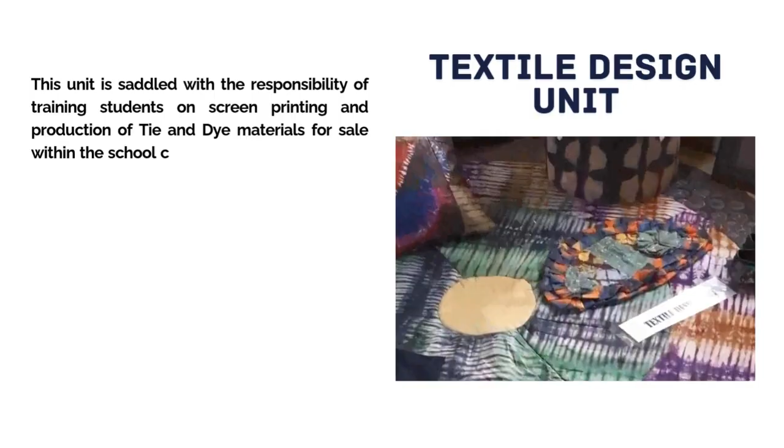Textile Design Unit. This unit is saddled with the responsibility of training students on screen printing and production of tie and dye materials for sale within the school community. Textile design is diverse and has many branches, such as resist pattern cloth, tie and dye, batik and adire, screen printing, reverse applique, quilt making, patchwork, garment making, tailoring and spinning, knitting and woven fabrics. This unit also produced kampala for staff, batik for Wapoga Games, souvenirs for Texas Tech USA Tour, USAID/Winrock programs, printing on departmental lab coats, and other screen printing contracts.

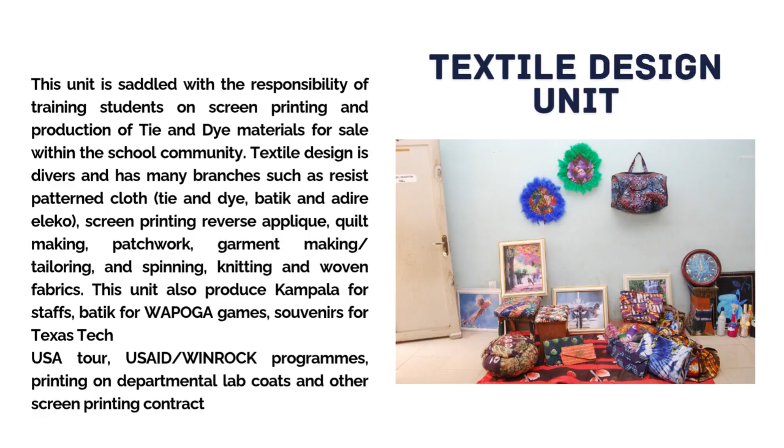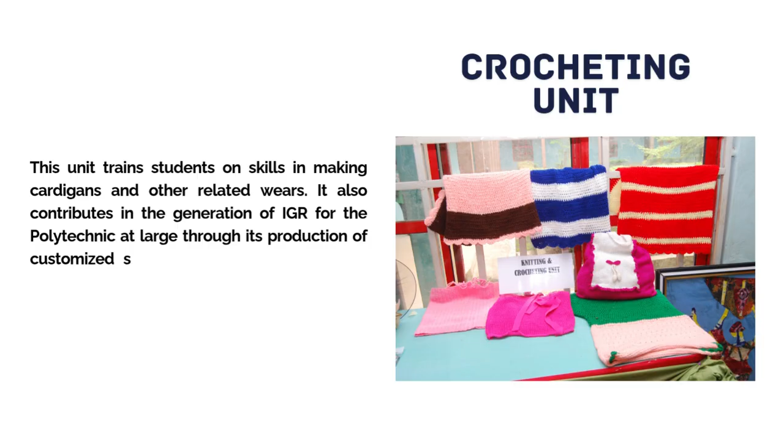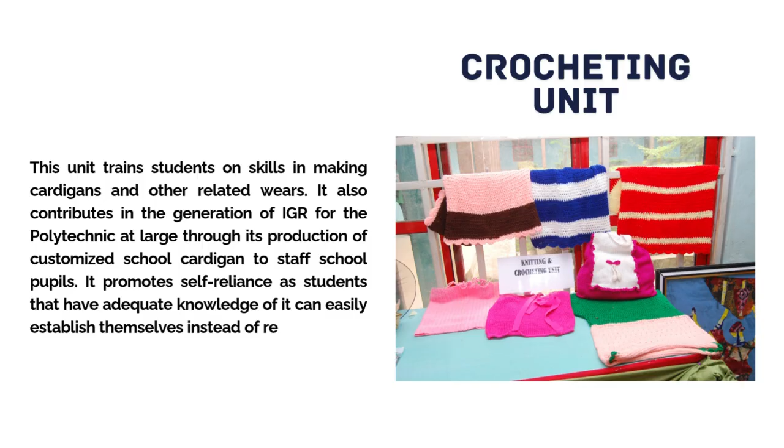Crocheting Unit. This unit trains students on skills in making cardigans and other related wares. It also contributes to the generation of IGR for the Polytechnic at large through its production of customized school cardigans for staff and school pupils. It promotes self-reliance, as students with adequate knowledge of it can easily establish themselves instead of remaining idle, waiting to acquire government jobs.

Bakery and Confectionery Unit. Bakery and confectionery is all about producing flour-based foods, which is practiced as one of the skills at CDVS. It is one of the most lucrative businesses in the state and Nigeria at large. It has a wide range of importance and benefits, and is a source of reasonable money-making investment that any good investor can venture into. Below are the major products produced at the bakery and confectionery unit: cupcakes, chocolate cakes, red velvet cakes, chin-chin, buns, puff-puff, egg roll, donuts, meat pies, fish rolls, spring rolls, samosa.

Soap Production Unit. This unit trains students, staff, organizations or individuals who are interested in the skill of soap production. The unit lays emphasis on training trainees on how to make a good recipe for different types of soap, such as laundry soap, liquid soap, toilet wash, detergent, shampoo, etc. Trainees are also trained on packaging and quality control, and on how to start with capital.

Leatherwork Unit. The sole function of this unit is training students on the production of leather products for self-reliance. These leather products include bags, male and female shoes, belts, souvenir bags, etc. Leather products businesses usually purchase finished leather from different suppliers to make the products according to the customer's demand.

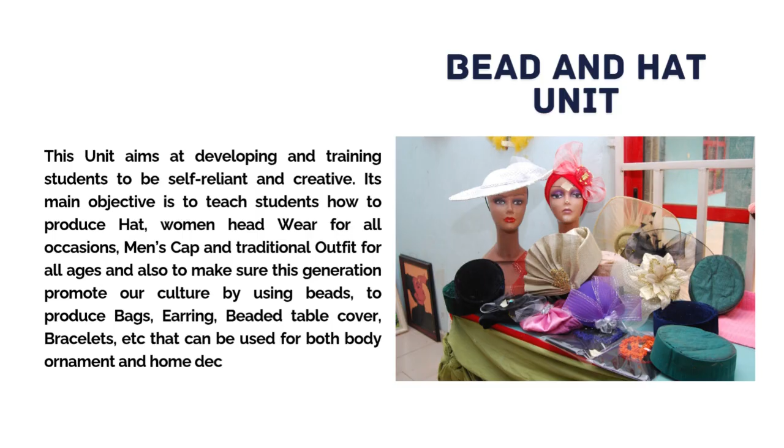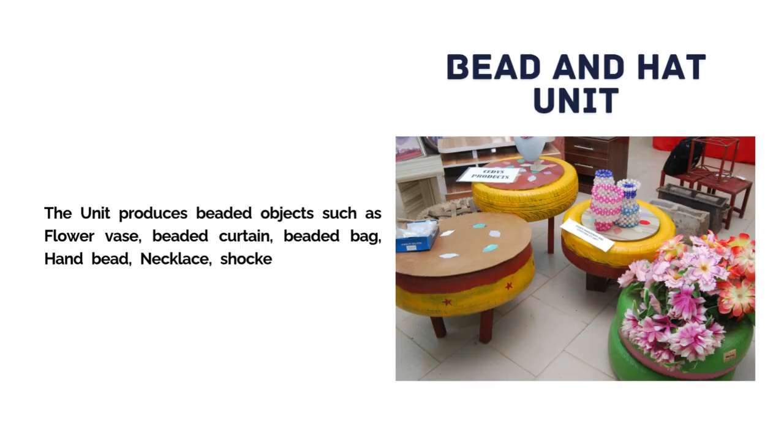Bead and Hat Unit. This unit aims at developing and training students to be self-reliant and creative. Its main objective is to teach students how to produce hats, women's headwear for all occasions, men's caps and traditional outfits for all ages, and to ensure this generation promotes our culture by using beads to produce bags, earrings, beaded table covers, bracelets and similar items, used for both body ornament and home decoration. The unit produces beaded objects such as flower vase, beaded curtain, beaded bag, hand bead, necklace, shocker, dining table cover, hat, fascinator, Awolowo's cap, Zara cap, head wraps, and so on.

Poultry Unit. This unit is used to train students on skill acquisition in respect to poultry business. It deals mainly with the production of chicken meat and eggs.

The details of the poultry unit facilities are stated below. Pen 1, 1,000 capacity layers pen. Pen 2, 1,000 capacity layers pen. Pen 3, 600 capacity broilers pen. Pen 4, 2,000 capacity broilers pen.

An average of 17 to 18 crates of eggs are being produced by the layers at the poultry pen per day as at date. Broilers are also stocked for periodic sales to meet a fractional level of customers' demands based on the existing financial and facility capacity.

Block production unit. This unit was created specifically for the purpose of training the students in the aspect of block production for sales, with the view of making them self-employed in the nearest future. It equips the students with basic skill to build up their practical experience in the aspect of proper molding of blocks that will always stand the test of time.

This block production unit, if given adequate financial backing with some fundamental management regulations put in place, can be a good source of internally generated revenue, IGR, for the Polytechnic at large. This is achievable if the underlisted measures are well established.

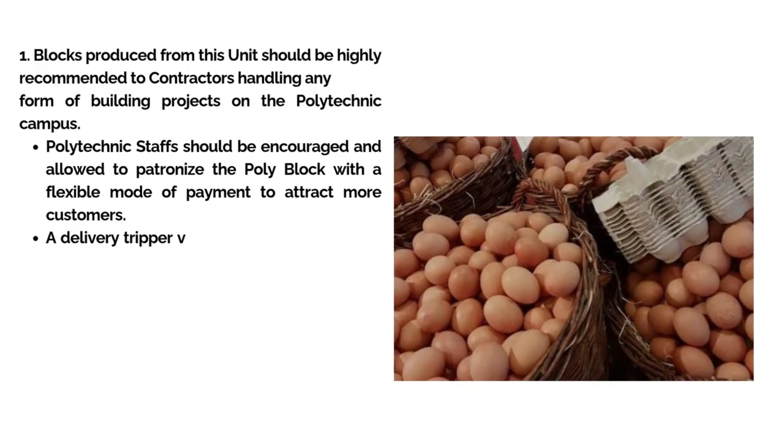A delivery tripper van that can efficiently load sand from the bush should be procured for this unit. This will give the unit free access to source and transport sharp sand materials freely instead of purchasing it at high cost from local suppliers. This will greatly reduce the overall cost of purchasing sharp sand for the production, thereby enhancing our profit margin.

Olusegun Obasanjo Center for Engineering Innovation. The center was established in 2002 as a center of excellence by the then Education Trust Fund, ETF, to make great impact in the world of engineering technology.

The completed project was commissioned by the then Honorable Minister of Education, Professor Babalola Borishade, on the 16th of May 2003. The sole objective of the center was to copy and transfer technology at all levels, produce equipment and machines by using a larger percentage of locally sourced materials, thereby promoting homemade products.

Students' industrial training is also of paramount priority to its objectives. Olusegun Obasanjo Center for Engineering Innovation was born out of the need for making engineering practices closer and available to the people. It was named Center for Engineering Innovation in order to cover a wide scope in the field of engineering practice.

It inculcates engineering practices and ethics into prospective students and trainees towards quality delivery of engineering products. The center is basically for technological transfer, technological incubation, engineering research and development. It also features in industrial and manufacturing processes as part of measures to meet people's demand in the area of agro-allied, scientific, domestic, and industrial machines and equipment which are research-based with standard evaluation parameters.

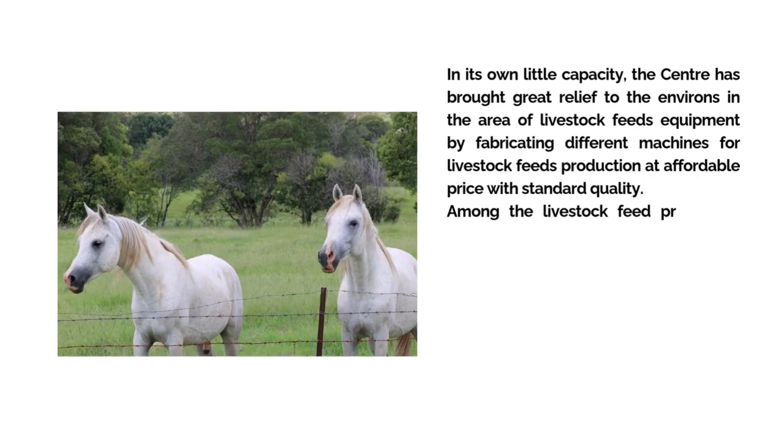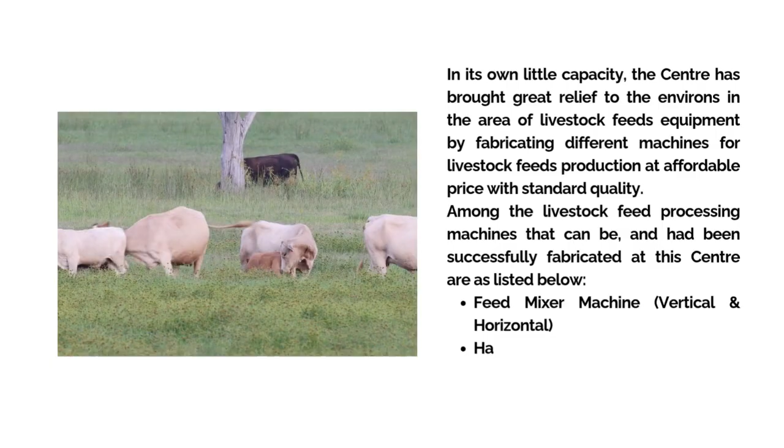In its own little capacity, the center has brought great relief to the environs in the area of livestock feeds equipment by fabricating different machines for livestock feeds production at affordable price with standard quality. Among the livestock feed processing machines that can be and has been successfully fabricated at this center are listed below: feed mixer machine, vertical and horizontal, hammer mill machine, pulverizing machine, pelletizing machine.

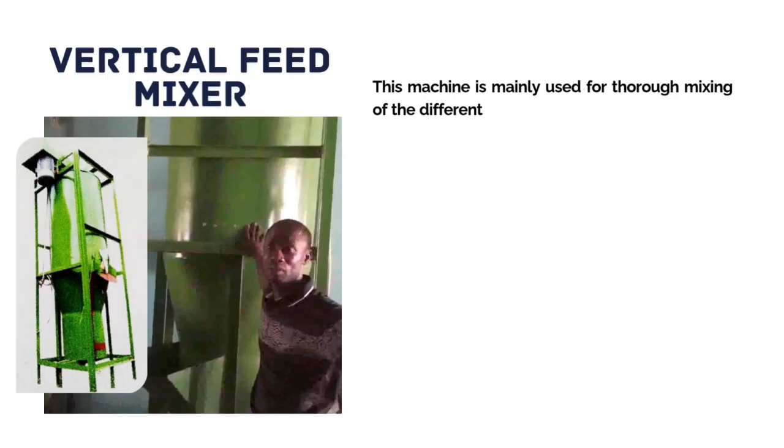Vertical feed mixer. This machine is mainly used for thorough mixing of the different components that formulate both fish and livestock feeds. It is fabricated in vertical form but can also be produced in horizontal form as well. It is widely used for both commercial and industrial production of feeds on a large scale.

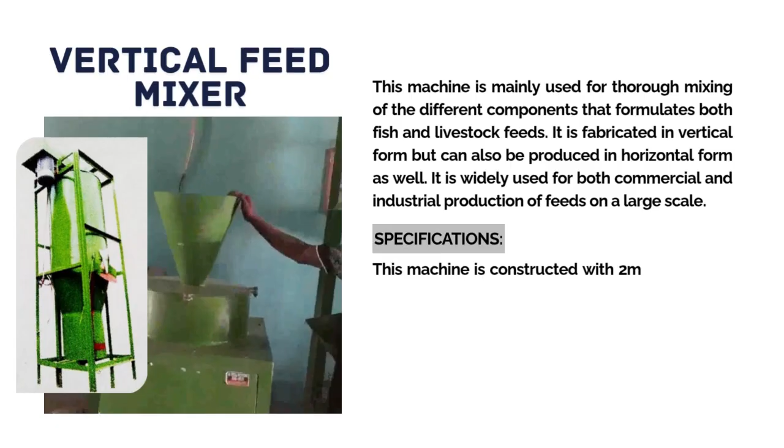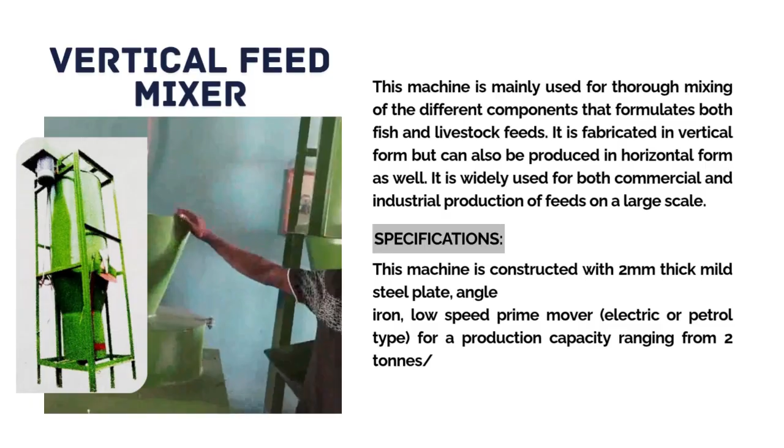This machine is constructed with 2 mm thick mild steel plate, angle iron, and a low-speed prime mover, either electric or petrol type, for a production capacity ranging from 2 tons per day, depending on the fabricated size. The machine is incorporated with a 20 HP electric motor in line with its design calculation.

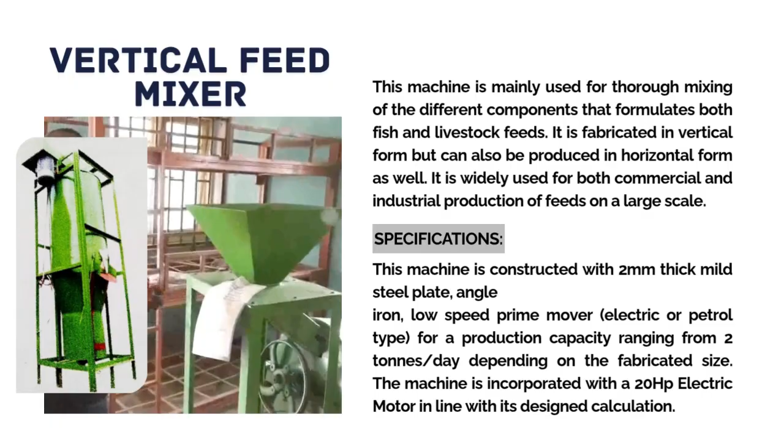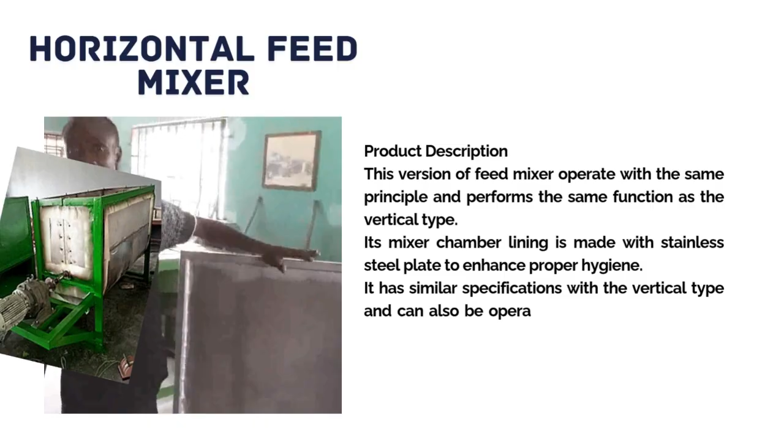Horizontal feed mixer. This version of feed mixer operates with the same principle and performs the same function as the vertical type. Its mixer chamber lining is made with stainless steel plate to enhance proper hygiene. It has similar specifications with the vertical type and can also be operated with either an electric motor or a petrol engine of required power rating.

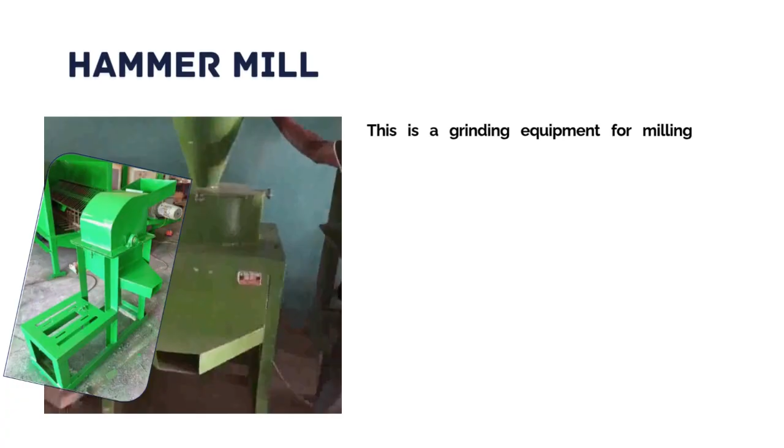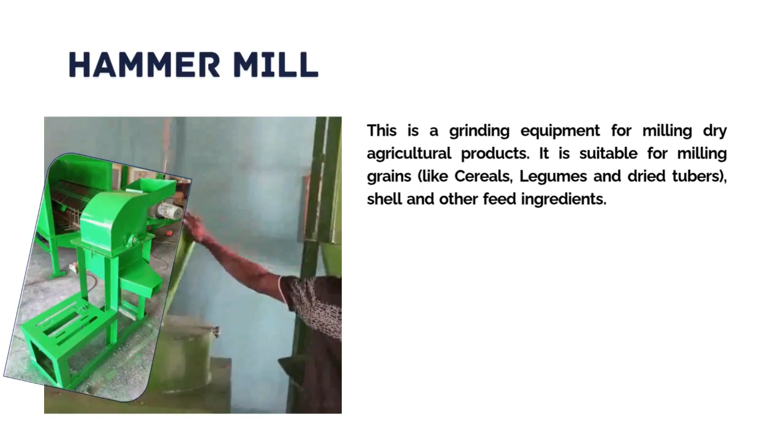Hammer mill. This is a grinding equipment for milling dry agricultural products. It is suitable for milling grains like cereals, legumes and dried tubers, shell and other feed ingredients. Currently, it has become an essential machine for most feed factories, powdered food producers, etc.

This machine is fabricated with 8 mm thick mild steel plate, angle iron, square pipe, etc. Its production capacity is 5 tons per day.

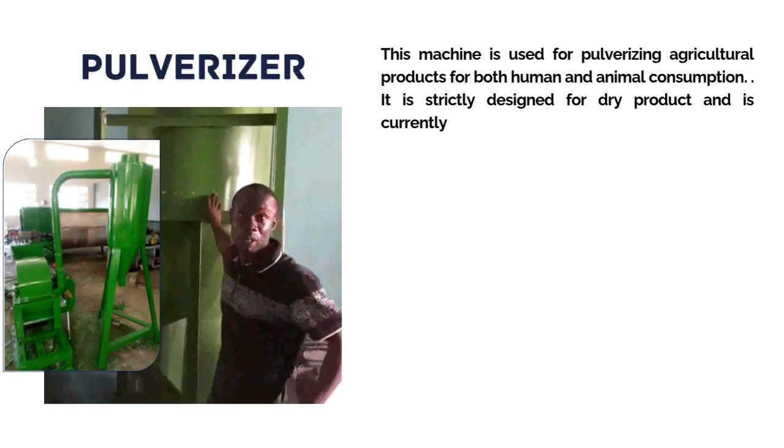Pulverizer. This machine is used for pulverizing agricultural products for both human and animal consumption. It is strictly designed for dry product and is currently the most suitable for the production of fine pulverized flour.

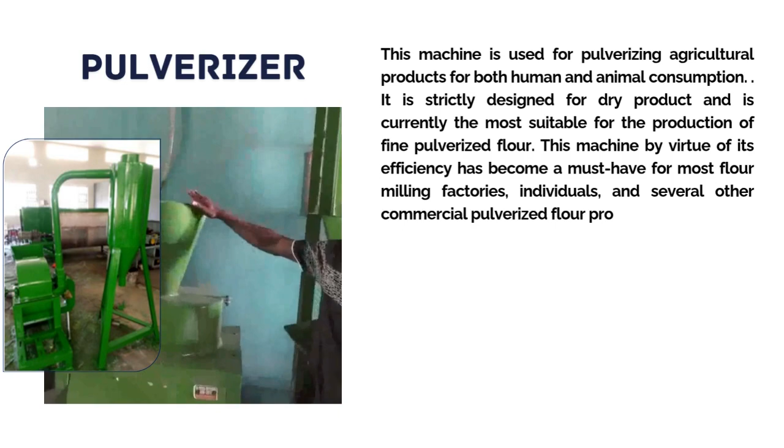This machine, by virtue of its efficiency, has become a must-have for most flour milling factories, individuals, and several other commercial pulverized flour-producing outfits. This machine is constructed with 3 mm thick mild steel plate, angle iron, fine mesh, and mild steel round pipe. It is incorporated with a high-speed electric motor and a powerful blower for efficient output delivery.

It has a loading capacity of 20 kg and a delivery capacity of 2 tons per day.

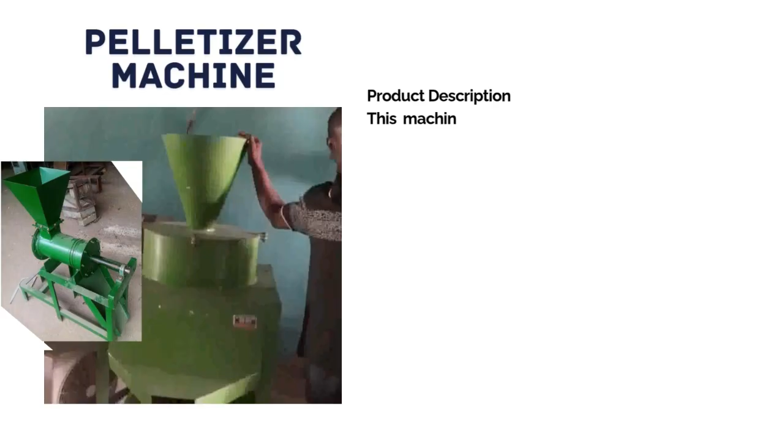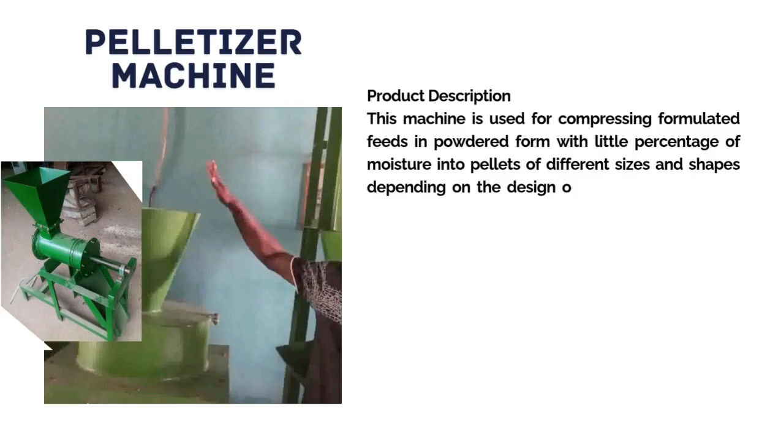Pelletizer machine. This machine is used for compressing formulated feeds in powdered form with a little percentage of moisture into pellets of different sizes and shapes, depending on the design of its attached extruder accessory. It is widely used for small-scale production of livestock like fish feeds.

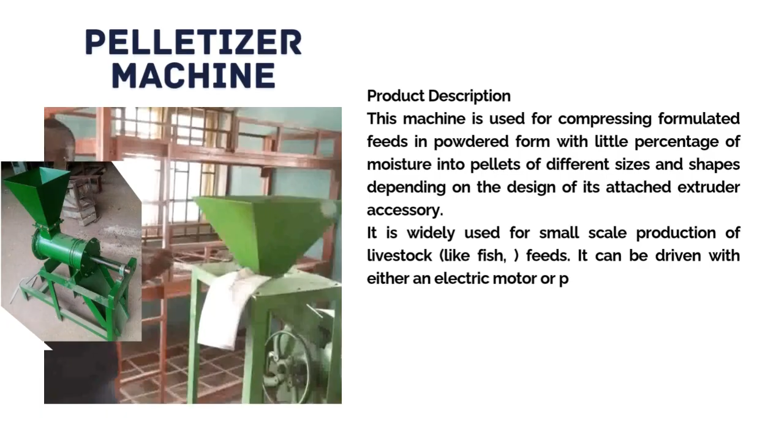It can be driven with either an electric motor or petrol engine of required power rating. This machine is fabricated with thick mild steel plate, angle iron, quality bearings, and strong shaft.

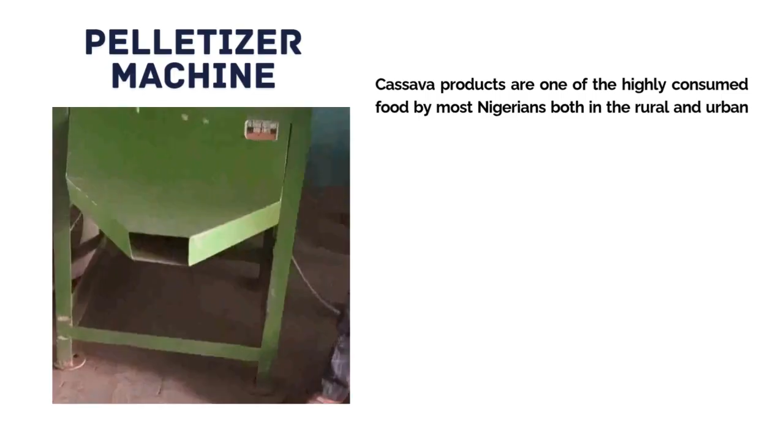Cassava processing. Cassava products are one of the highly consumed foods by most Nigerians, both in the rural and urban settings. The most widely consumed among its products is garri. Hence, the need to mechanize its production process for adequate supply to sustain the nation's population demand and promote exportation values for national economic growth at large.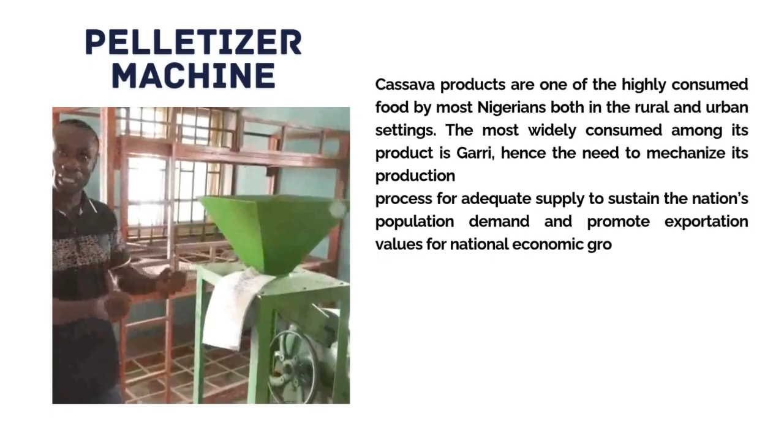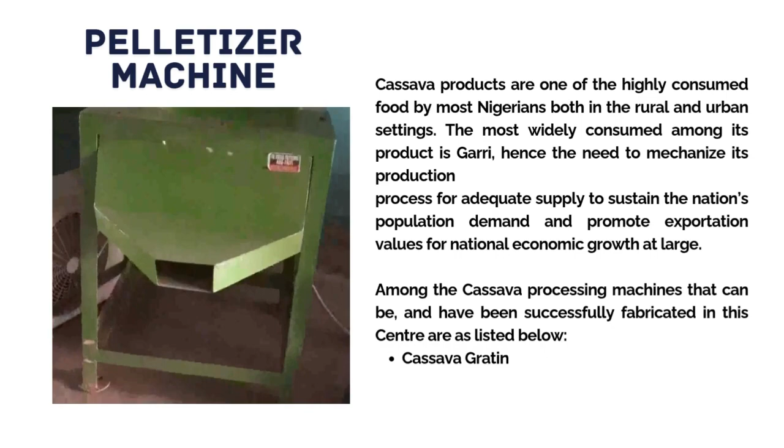Among the cassava processing machines that can be and have been successfully fabricated in this center are listed below: cassava grating machine, cassava chipping machine, cassava mash pressing machine, and garri fryer.

Cassava grater. This machine is a modern advancement for the replacement of the manual process of grating cassava tuber by rubbing it against sharp edges of perforated holes. It is mainly used during the production of garri.

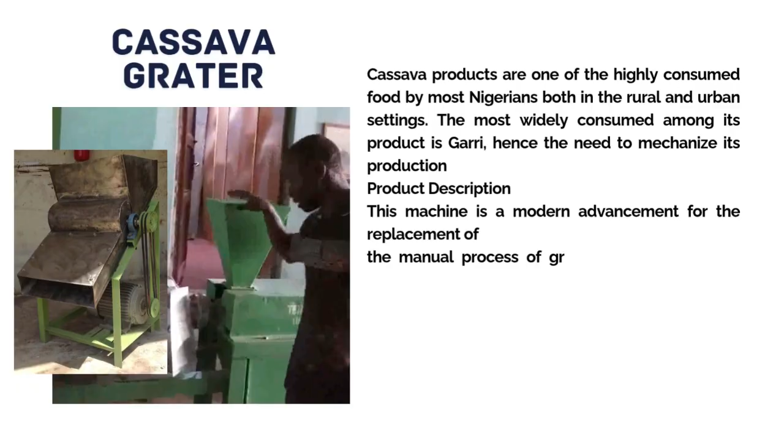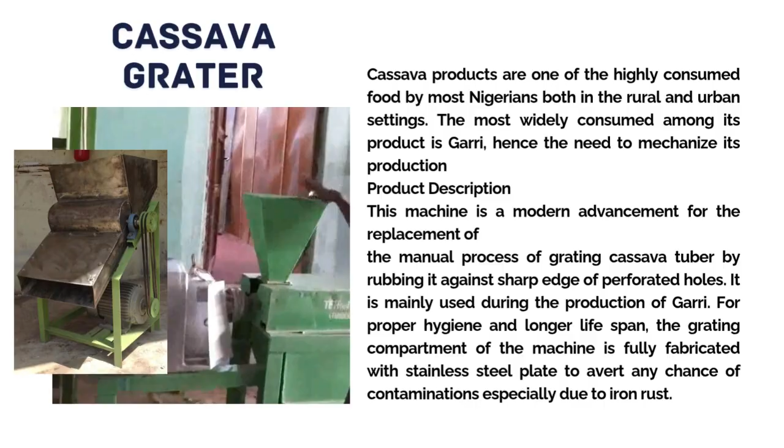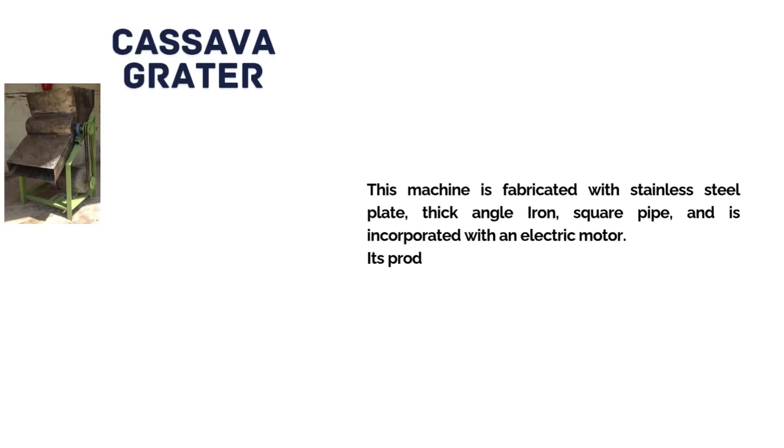For proper hygiene and longer lifespan, the grating compartment of the machine is fully fabricated with stainless steel plate to avert any chance of contamination, especially due to iron rust. This machine is fabricated with stainless steel plate, thick angle iron, square pipe, and is incorporated with an electric motor. Its production capacity is 2 tons per hour.

Cassava chipping machine. This industrial machine is designed to cut peeled cassava into chips. The shape of the chips is determined by the designed pattern on the chip plate of the machine. The machine is fabricated with 2 mm mild steel plate, angle iron, and strong shaft. It is incorporated with an electric motor and has a performance capacity of 150 kg per hour.

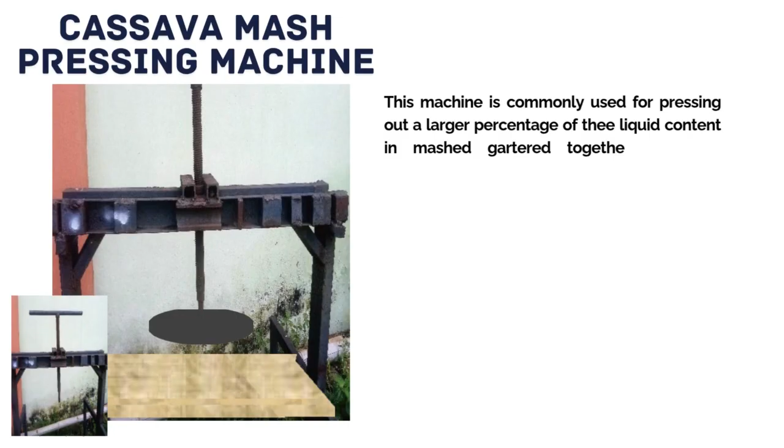Cassava mash pressing machine. This machine is commonly used for pressing out a larger percentage of the liquid content in mash gathered together after the grinding stage. It facilitates easy collection of the liquid content for the production of starch. The most commonly applied pressing mechanism in this machine is either a strong screwing lever or a hydraulic jack.

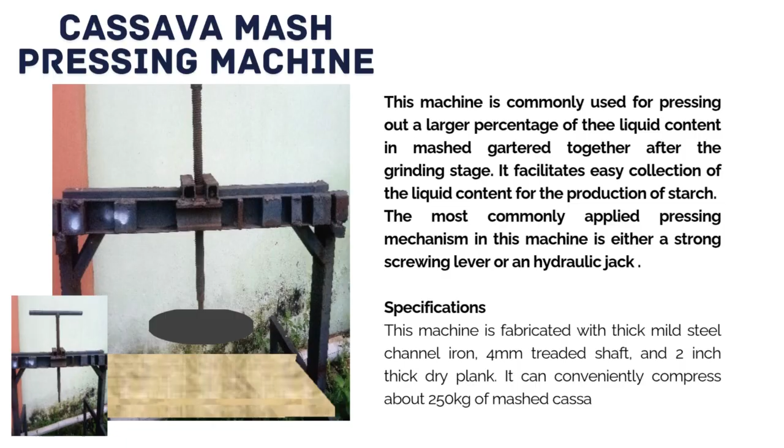This machine is fabricated with thick mild steel channel iron, 4 mm threaded shaft, and 2-inch thick dry plank. It can conveniently compress about 250 kg of mashed cassava at a time.

Garri fryer. This machine has mechanized the manual method of frying cassava mash into edible garri, thereby making the old tedious process of frying more hygienic, stress-free, and time-saving.

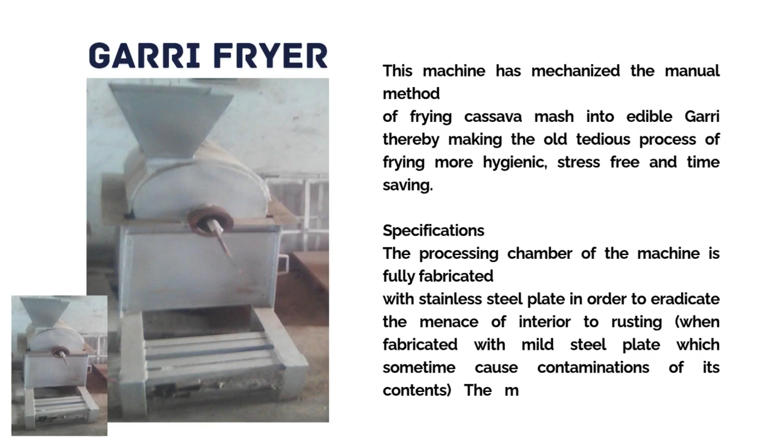The processing chamber of the machine is fully fabricated with stainless steel plate in order to eradicate the menace of interior rusting, which occurs when fabricated with mild steel plate and sometimes causes contamination of its contents. The machine has a production capacity of 100 kg per hour.

Palm fruit processing. Palm fruit processing is a multi-stage exercise that results in a final product of palm oil and palm kernel oil, among other products. These stages are as listed below: gathering of fresh palm fruit bunches from the field, removal of the palm fruits from the bunches.

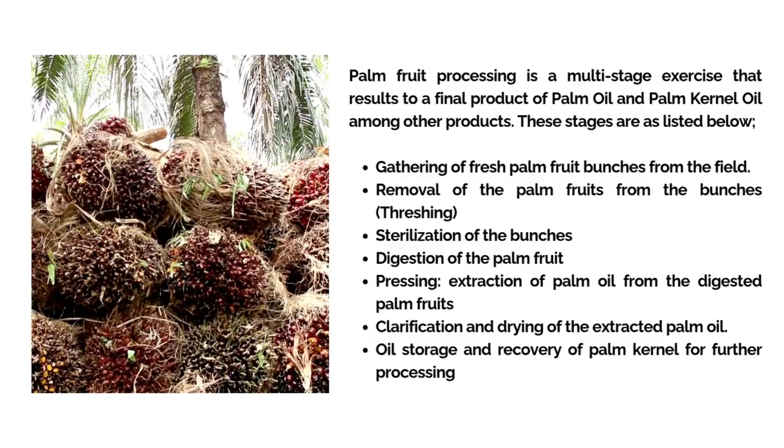Threshing, sterilization of the bunches, digestion of the palm fruit, pressing—that is, extraction of palm oil from the digested palm fruits—clarification and drying of the extracted palm oil, oil storage, and recovery of palm kernel for further processing that eventually generates palm kernel oil.

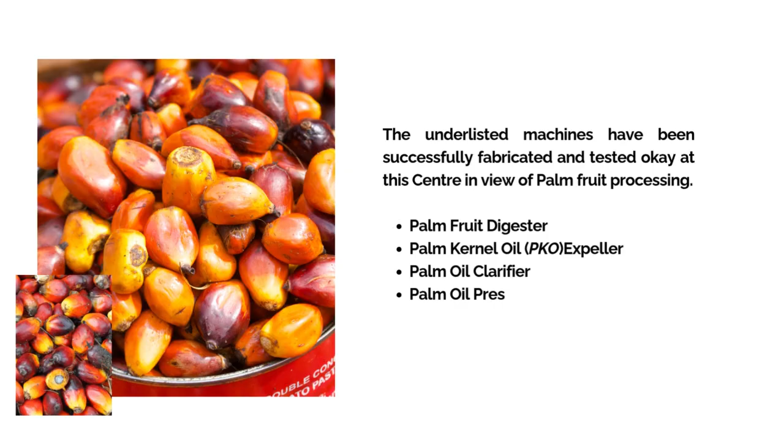The underlisted machines have been successfully fabricated and tested okay at this center in view of palm fruit processing: palm fruit digester, palm kernel oil (PKO) expeller, palm oil clarifier, palm oil pressing machine, palm nut sterilizer machine, palm kernel shell separator machine, and palm nut cracking machine.

Palm nut sterilizing machine. This machine is used to inactivate the lipases in palm fruit through the application of pressurized steam and prevents buildup of free fatty acids (FFA), thereby facilitating easy stripping of the palm fruit from the bunch.

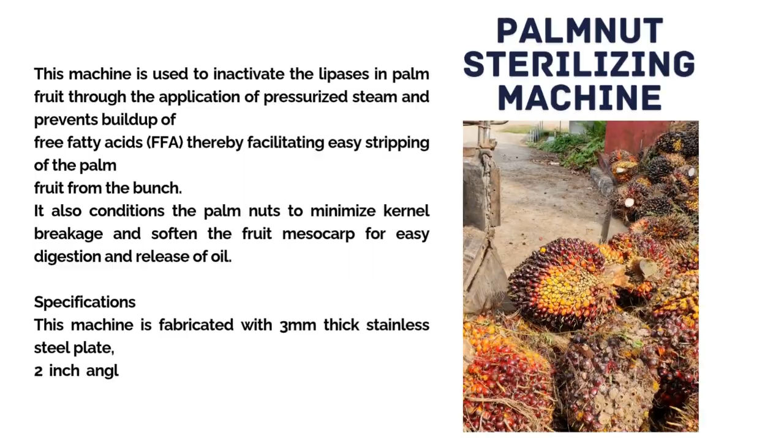It also conditions the palm nuts to minimize kernel breakage and soften the fruit mesocarp for easy digestion and release of oil. This machine is fabricated with 3 mm thick stainless steel plate, 2-inch angle iron, 2 mm thick mild steel plate, pressure gauge, etc. It has a capacity of sterilizing 70 kg of palm fruit per hour.

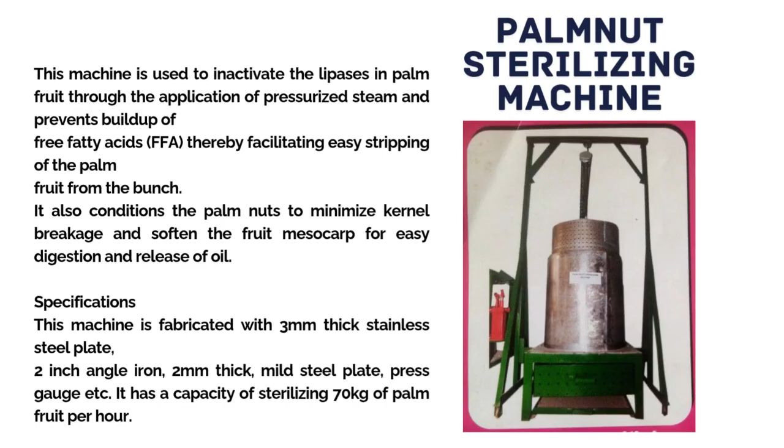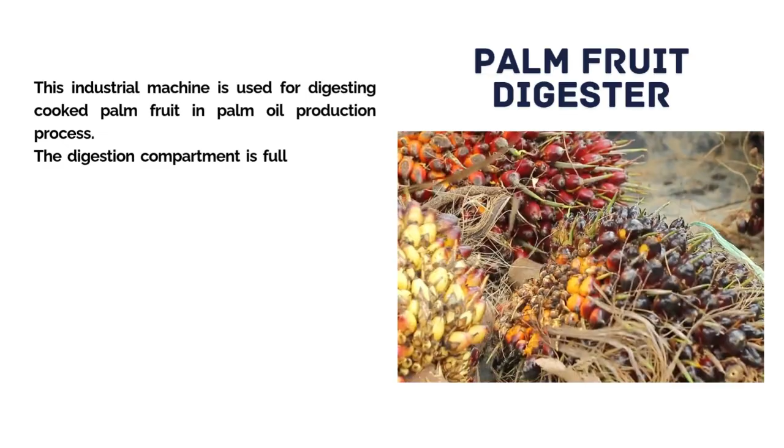Palm fruit digester. This industrial machine is used for digesting cooked palm fruit in the palm oil production process. The digestion compartment is fully fabricated with stainless steel materials to enhance proper hygiene.

The machine can be driven with an electric motor or petrol engine, especially in remote areas. It is fabricated with thick stainless steel plate, fine mesh, angle iron, and electric motor, among other components.

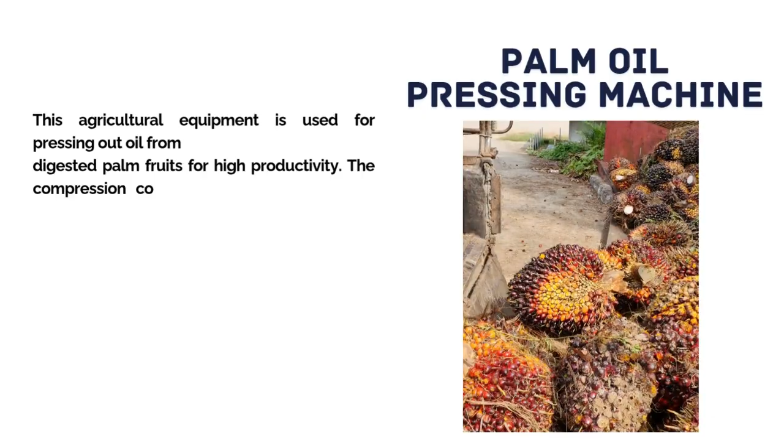Palm oil pressing machine. This agricultural equipment is used for pressing out oil from digested palm fruit for high productivity. The compression compartment is fully fabricated with stainless materials to enhance proper hygiene.

The equipment is fabricated with 5 mm thick stainless steel plate and mild steel U-channel iron. It is incorporated with a standard pressure gauge, hydraulic press, and a low-speed electric motor.

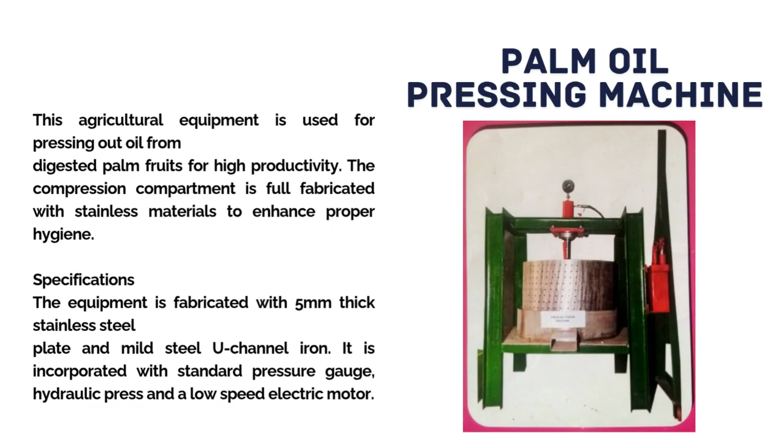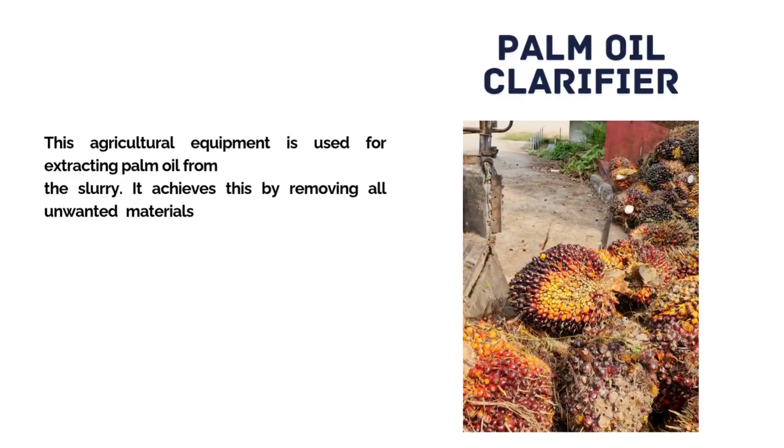Palm oil clarifier. This agricultural equipment is used for extracting palm oil from the slurry. It achieves this by removing all unwanted materials from the palm oil while the sludge is collected through another vent. The equipment is fabricated with 3 mm thick stainless steel plate, angle iron, thick mesh, electric motor, etc. Its production capacity is 2 tons per day.

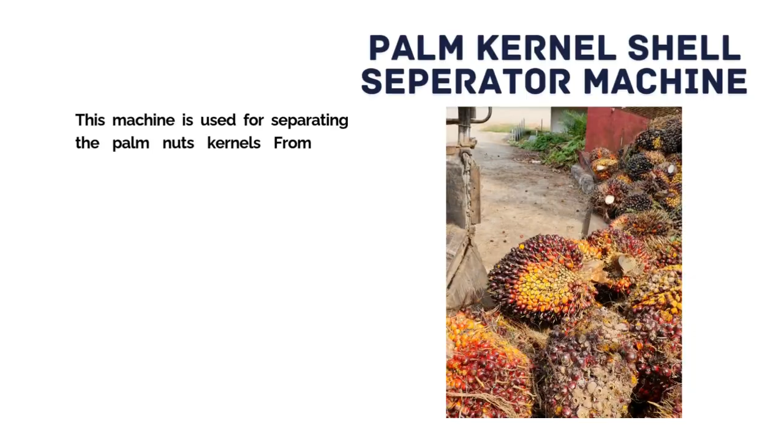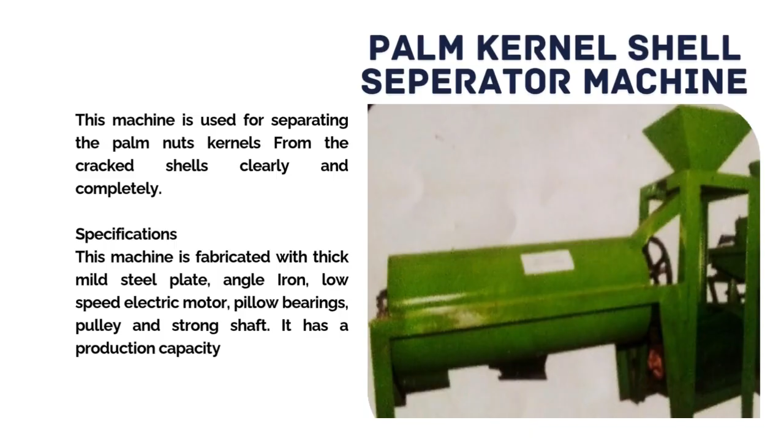Palm kernel shell separator machine. This machine is used for separating the palm kernel from the cracked shells clearly and completely. It is fabricated with thick mild steel plate, angle iron, low-speed electric motor, pillow bearings, pulley, and a strong shaft. It has a production capacity of about 300 kg per hour.

Palm nut cracking machine. This machine is designed to simplify and mechanize the process of cracking and breaking palm nuts into smaller pieces for further processing. It eliminates the hardship encountered with manual cracking by hand and can also be used for other similar cracking tasks.

The machine is fabricated with thick mild steel plate, angle iron, high-speed electric motor, pulley, strong shaft, etc. It has a processing capacity of about 250 kg per hour.

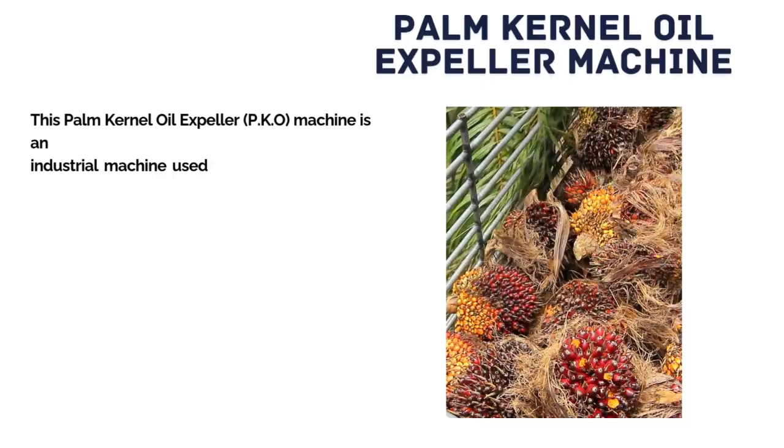Palm kernel oil expeller machine. This palm kernel oil (PKO) expeller machine is an industrial machine used for expelling oil from palm kernel seed. The machine performs both the squeezing and expelling tasks simultaneously.

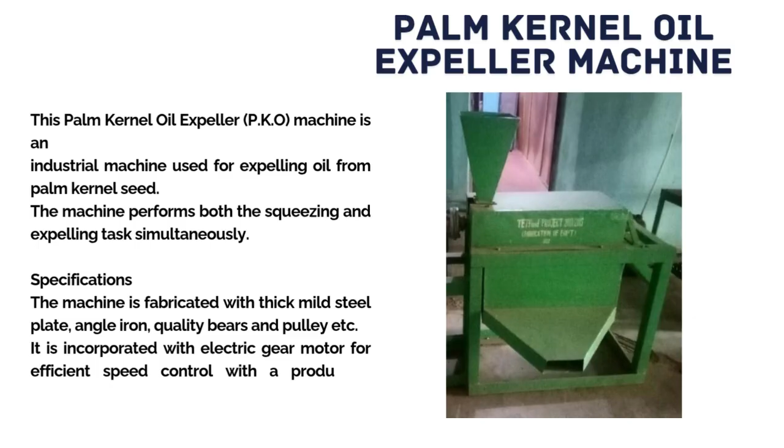The machine is fabricated with thick mild steel plate, angle iron, quality bearings, and pulley, etc. It is incorporated with an electric gear motor for efficient speed control, with a production capacity of 2.5 tons per day.

Laboratory apparatus.

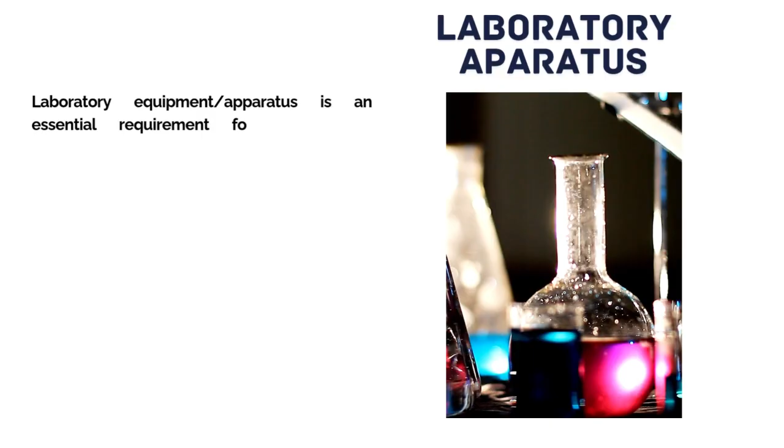Laboratory equipment is an essential requirement for practicalizing theoretical concepts for real-life applications, thereby creating a lasting memory in the mind of students and others in similar categories. Few among the laboratory equipment that have been successfully fabricated and tested okay at this center are: injector testing machine, biogas digester, Magnus truss apparatus, plastic bending of portal frame (PBOPF) apparatus.

Injector testing machine: this automobile laboratory equipment is used to ascertain the working condition of an automobile injector pump. It is widely used by auto electricians or related personnel in higher institutions, laboratories, colleges, schools, and automobile workshops. It is designed and fabricated with high precision to ensure accurate test results.

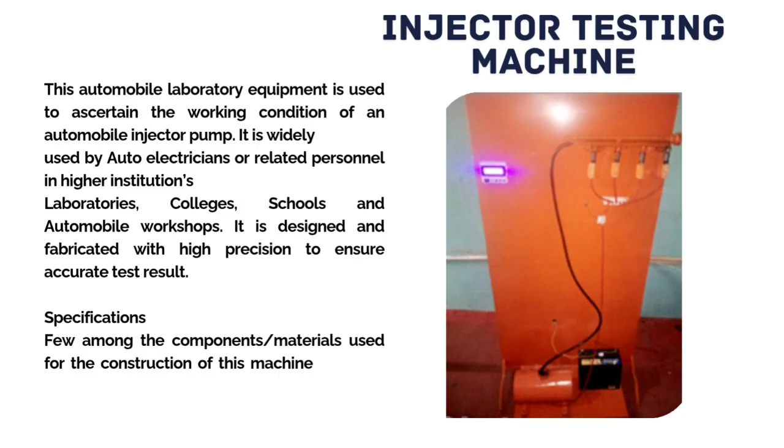Few among the components and materials used for the construction of this machine are mild steel plate, pipes, scale reading machine, etc.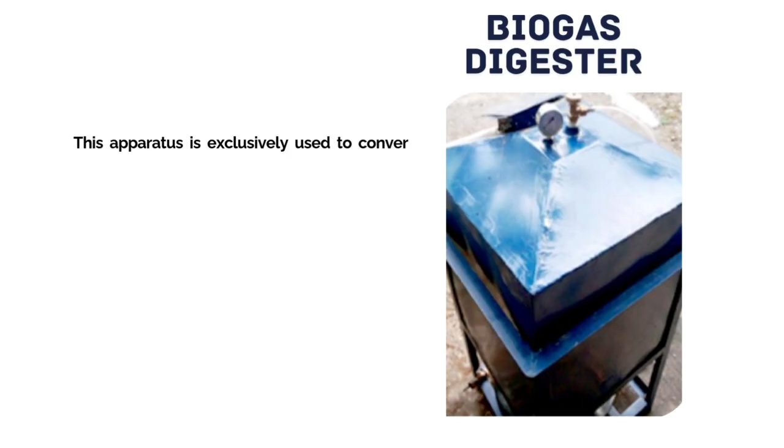Biogas digester: this apparatus is exclusively used to convert wastes into domestic cooking gas. It is designed for laboratory experimentation of biogas production from animal waste products like cow dung, human feces, etc. It is fabricated with 1 mm mild steel plate, pressure gauge, angle iron, among other components.

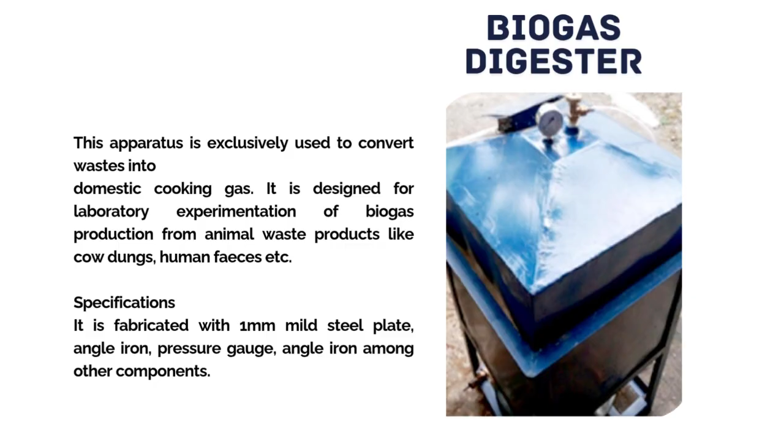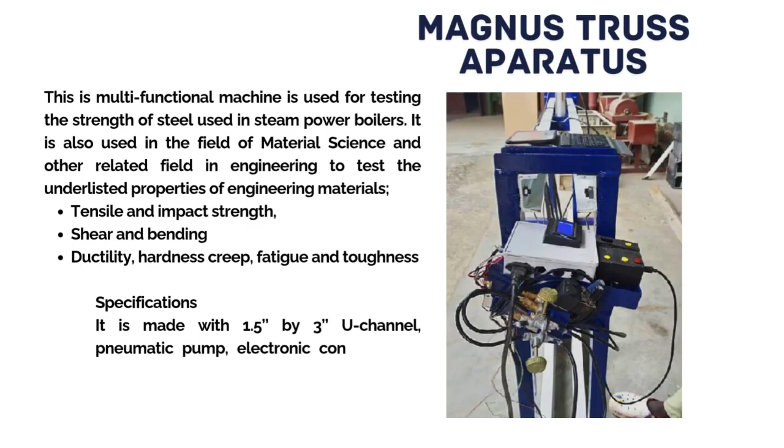It is made with 1.5 by 3 U-channel, pneumatic pump, electronic control panel, EMC, etc.

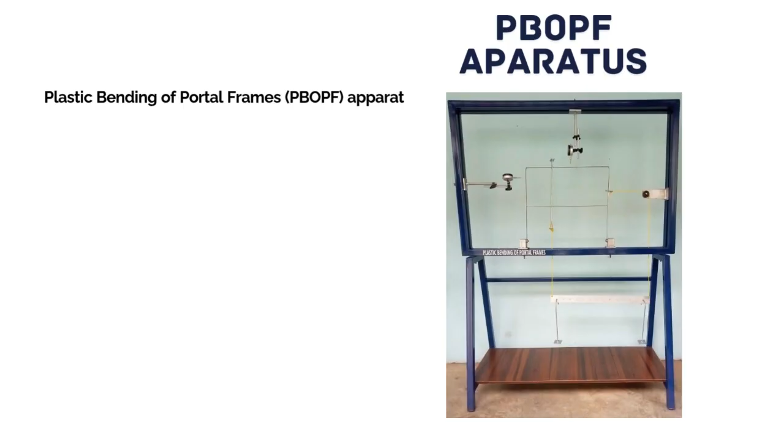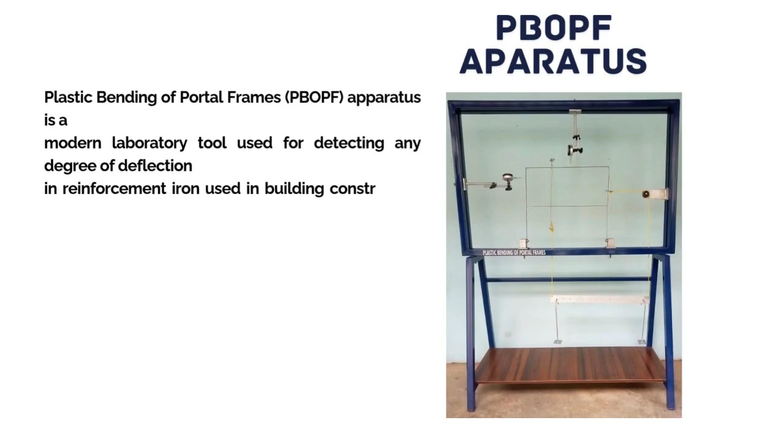PBOPF apparatus: Plastic Bending of Portal Frames apparatus is a modern laboratory tool used for detecting any degree of deflection in reinforcement iron used in building construction, in order to make the best choice of material specification.

It features 3 mm by 25 black mild steel portals with loading capacity of 0 to 300 newtons, a digital dial gauge with 25.4 mm travel and 0.01 mm resolution, and a supporting frame of 38.1 mm by 1.2 mm square pipe.

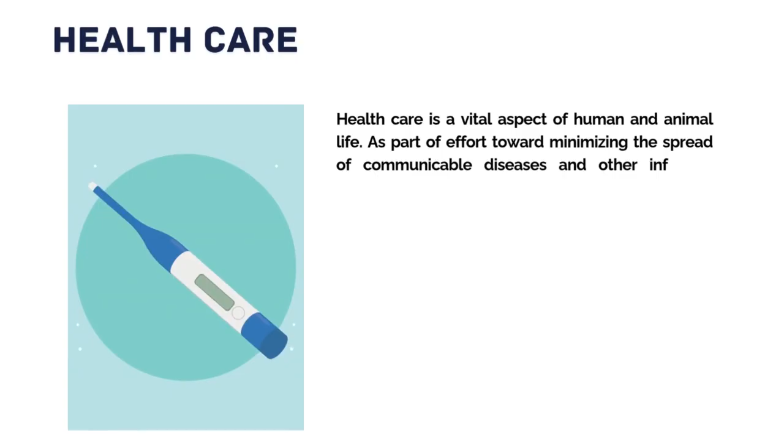Healthcare is a vital aspect of human and animal life. As part of efforts towards minimizing the spread of communicable diseases and other infections within society, the OOCEI has immensely contributed to the healthcare sector via its design and construction of useful machines to promote good health within society at large. The underlisted healthcare facilities have been successfully fabricated and tested okay at this center.

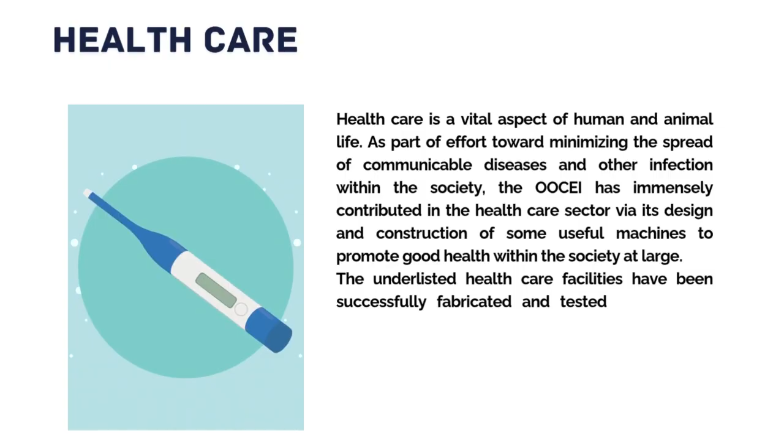Disinfecting machine, dust extractor, hand washing machine, pedal operated.

Disinfecting machine: the sole function of this machine is to smartly sanitize any individual that passes through its entrance, from going out to spread or coming into contact with any kind of easily transmitted disease in the environment. The machine is electrically powered and can be operated with other power sources like solar inverter.

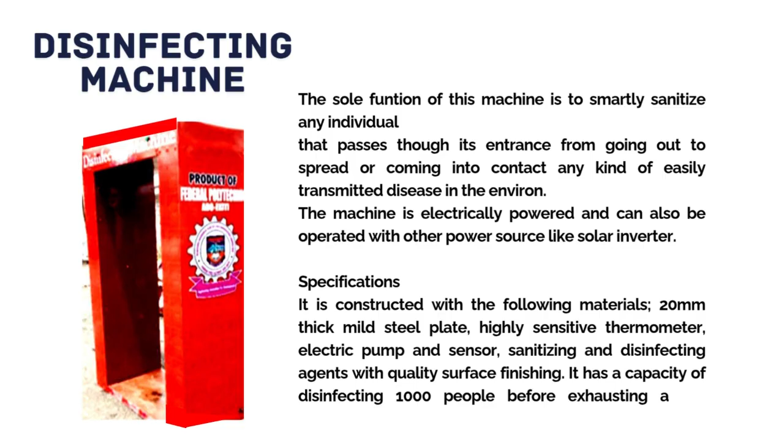It is constructed with the following materials: 20 mm thick mild steel plate, highly sensitive thermometer, electric pump and sensor, sanitizing and disinfecting agents, with quality surface finishing. It has a capacity of disinfecting 1,000 people before exhausting a full reservoir of its reagent.

Dust extractor: this machine is an advancement of the conventional home vacuum cleaner. Its principle of operation is quite similar, but with significant difference in material strength, making it more suitable for industrial and heavy-duty work in workshops, offices, and other commercial outfits.

This extractor is fabricated with 1.2 mm mild steel plate, angle iron, round pipe, electric motor, flexible rubber hose, etc. Its performance capacity is 20 m² per hour.

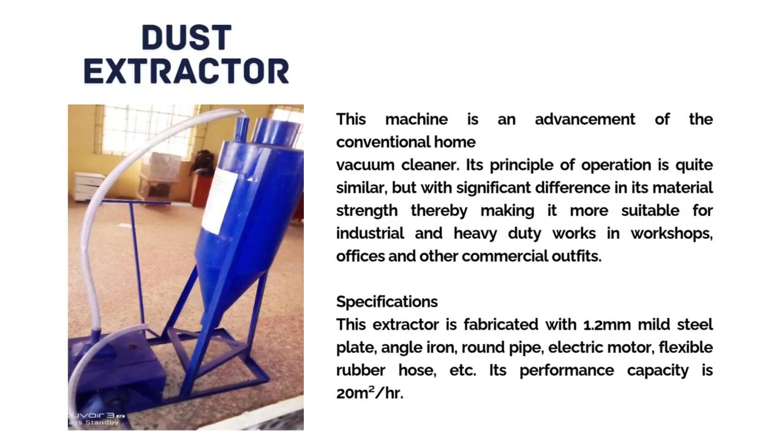Hand washing machine: this machine is designed to promote hygiene at both private and public arenas. It helps to minimize the chances of contracting communicable infections that could easily be transmitted by mere hand touch. It is widely used in financial institutions, academic institutions, hospitals, industries, and several commercial outfits.

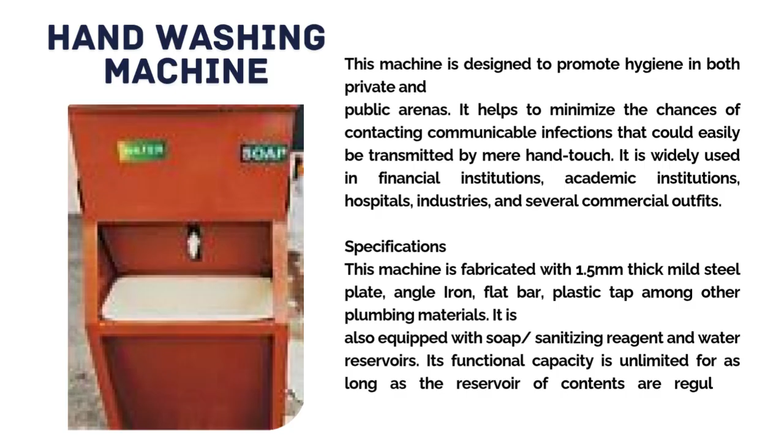This machine is fabricated with 1.5 mm thick mild steel plate, angle iron, flat bar, plastic tap, among other plumbing materials. It is also equipped with soap, sanitizing reagent, and water reservoirs. Its functional capacity is unlimited for as long as the reservoir contents are regularly replenished.

Metalworks is an essential aspect of engineering constructions. It involves the use of iron in form of plates, pipes, rods, bars, etc., and other mechanical machines for the fabrication of equipment, machines, and other engineering construction components.

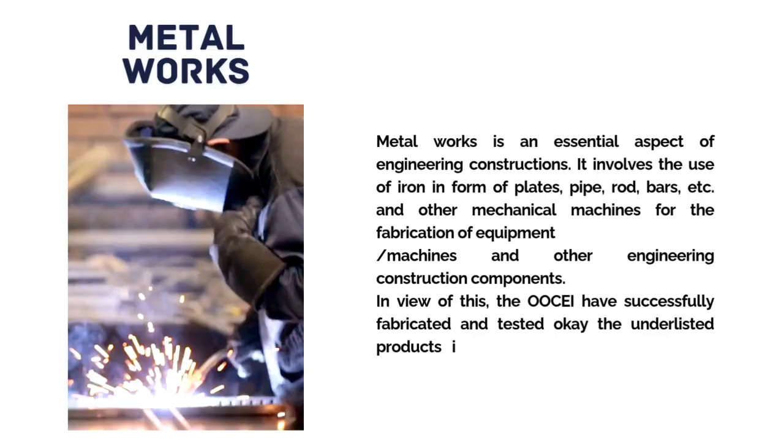In view of this, the OOCEI has successfully fabricated and tested okay the underlisted products in this aspect of engineering for additional values and improved productivity.

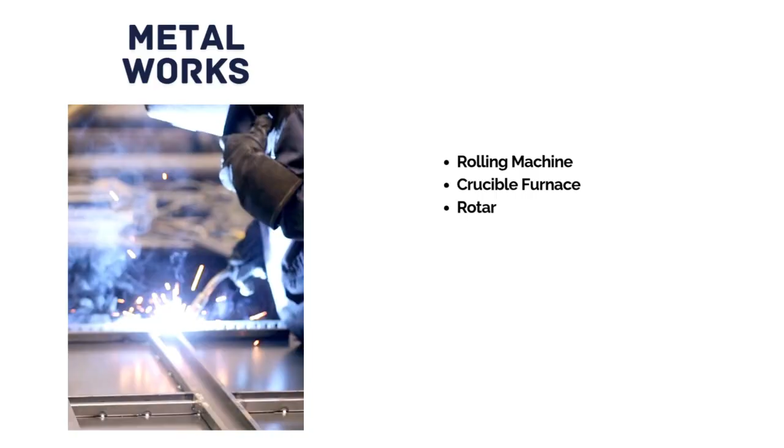Rolling machine, crucible furnace, rotary furnace, triple bed bunk, double bed bunk, security door or gate, cantilever shed, rock cutting machine.